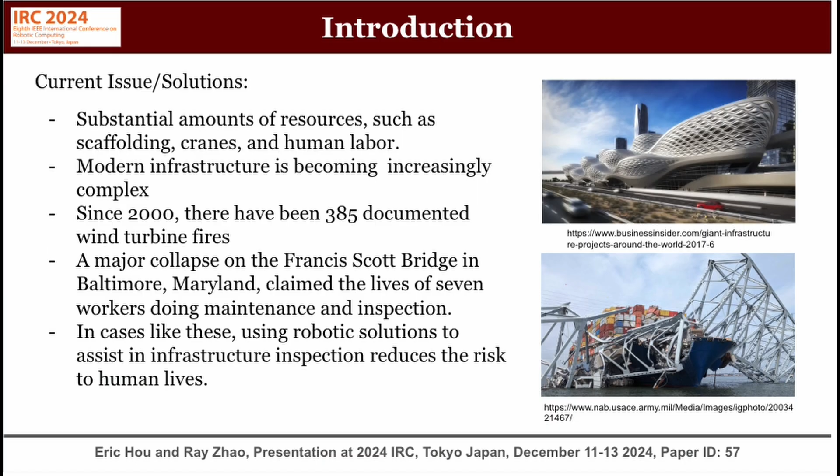Our research objective is to create an infrastructure climbing robot that's able to reach difficult spaces and navigate dangerous environments. It must have an independent autonomous navigation that's able to localize itself in 3D and traverse obstacles in its way. It must also have a high cargo capacity while staying lightweight itself with a rigid structure and overall having a relatively low cost for mass production in the long term.

And we achieve this through Vertipaw, as it's the first quadrupedal robot capable of delivering loads greater than 4 kilograms on any planar surface. And it does this by using an active vacuum suction system that's able to maintain over 150 kilograms stationary. But this suction power also allows it to adapt to rougher surfaces.

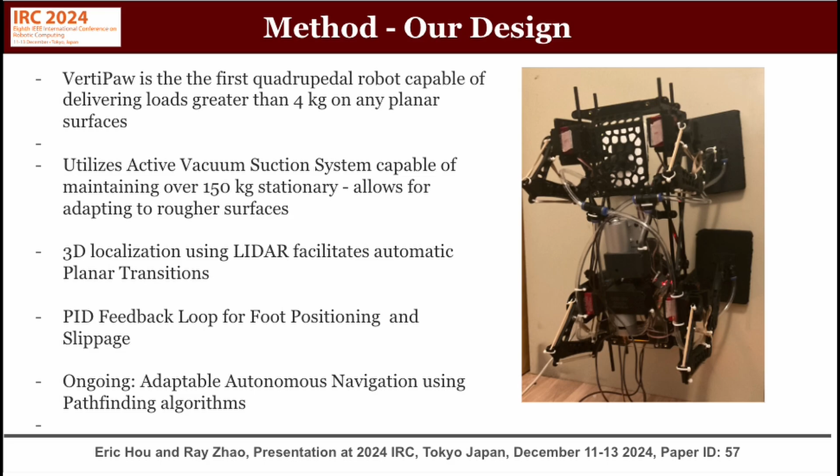The 3D localization is facilitated with LiDAR, and it's able to automatically transition planes, whether it's the wall to the ground, or the ground to the wall, or the wall to the roof, or any other angle. The LiDAR is able to detect that, and it also uses a PID feedback loop for foot positioning and potential slippage. And we're currently still working on the adaptable autonomous navigation system.

Our general hardware configuration consists of 4 legs held together with a carbon fiber rod frame with PETG clamps and struts for rigidity. We power it with a 12-volt power supply or a LiPo battery if we want it to be mobile. And the current suction pad can actually reach around 17 psi within 5 seconds.

And because the suction pad has an area of around 30 inches squared, this pad experiences over 500 pounds of force. And that's pretty astronomical considering we want to 3D print this with PETG. So we had to use finite element analysis to reinforce it. And we also use neoprene rubber strips on the outside that allow for minimal leakage. This allows the system to be unpowered for hours on end.

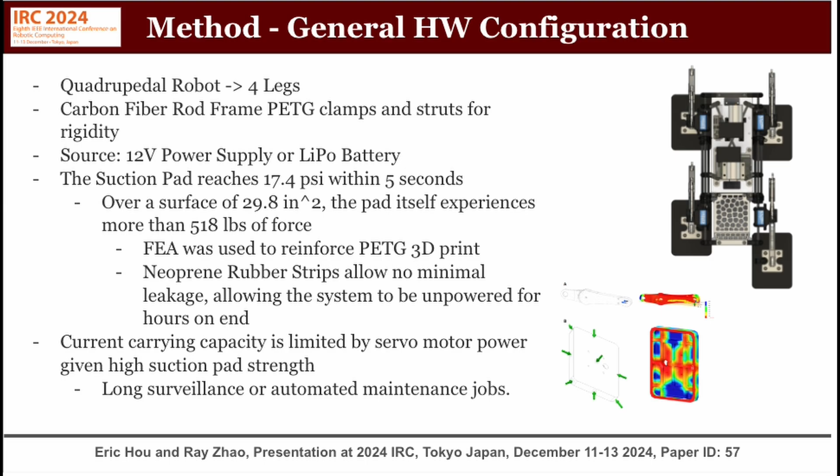And what this means is that the robot can stay on the wall and keep its position for, let's say, an hour or two before it needs to be suctioned again. And this allows for overnight maintenance with minimal power. But also because of how high the suction pad strength is, our current carrying capacity is actually limited by our servo motor power, which we aim to address with counter springing in the next slide.

So counter springing is needed because servo motors alone cannot pull up the entire weight of the robot against gravity. And in order to facilitate that, we use counter springing that closes the center linkage in order to pull up the robot. And we also have 2 other types of springing that allow for this.

So first we have suction pad springing, and this removes the need for active suction pad angle actuation at the bottom of the lower leg. While it's unsuctioned, this springing allows the foot to be within 15 degrees orthogonal to the lower leg. And this allows us to position the lower leg at the correct angle in order to transition planes without the need to change the suction pad angle manually.

And while it's suctioned, it can rotate around 40 degrees about the rotation point, and this allows the quadruped to gait. And finally, we have one more type of springing, which is over-centering prevention springing on the leg, and this prevents the leg linkage from being locked into the wrong configuration.

So if you solve the forward kinematics equations with the 2 motor angles, that can actually result in 2 different XYZ coordinate solutions depending on the configuration of the central linkage. So in order to prevent the leg linkage from going into the over-center clamped position, we want it to stay unclamped. So we have the blue elastic bands that keep it tensioned in one certain configuration.

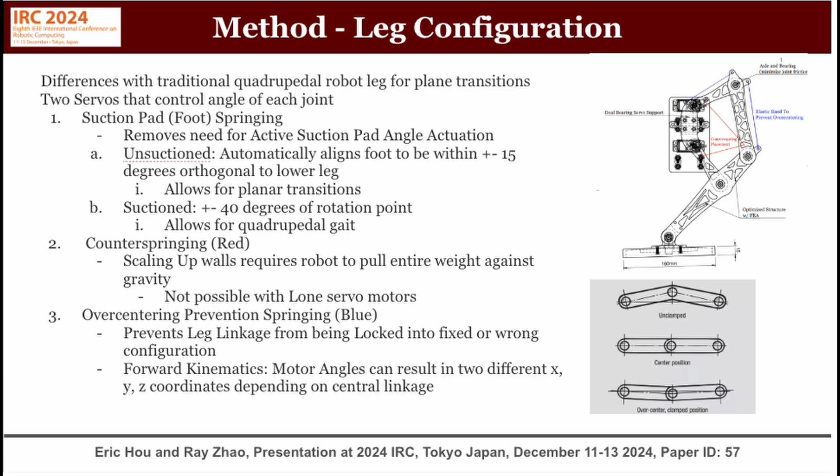Next, we use a Raspberry Pi 4B for all the processing, and we created a custom relay transistor PCB that drives each vacuum pump through a 12-volt power supply. Each vacuum pump drives 2 suction pads, and this is possible because there are never 2 pads on one side on the surface at once during movement. So for example, if we set 1, 2 as the 2 front legs and 3, 4 as the back legs, 1 and 4 are powered, and 2 and 3 are powered simultaneously with 1 suction pump.

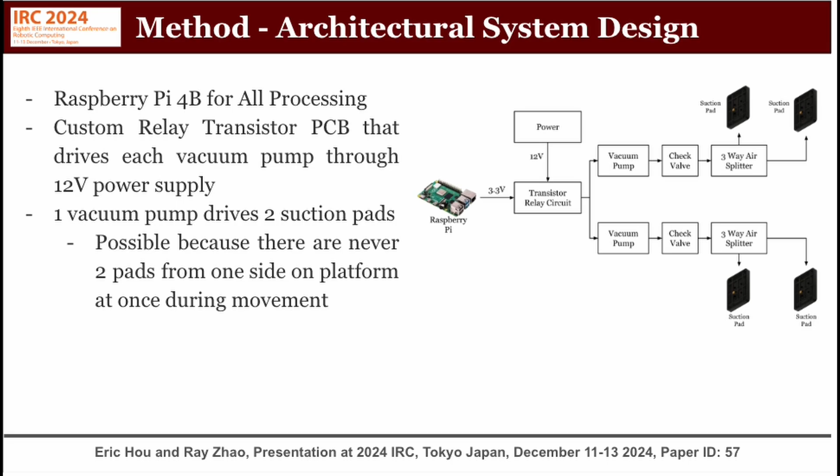So our inverse kinematics calculations are pretty standard. We do have an additional angle conversion because we use the upper linkage, but it's just derivable with basic trigonometry. And we're converting Cartesian coordinates, which is x, y, z, to theta 0, theta 1, which are servomotor angles, which is called inverse kinematics here.

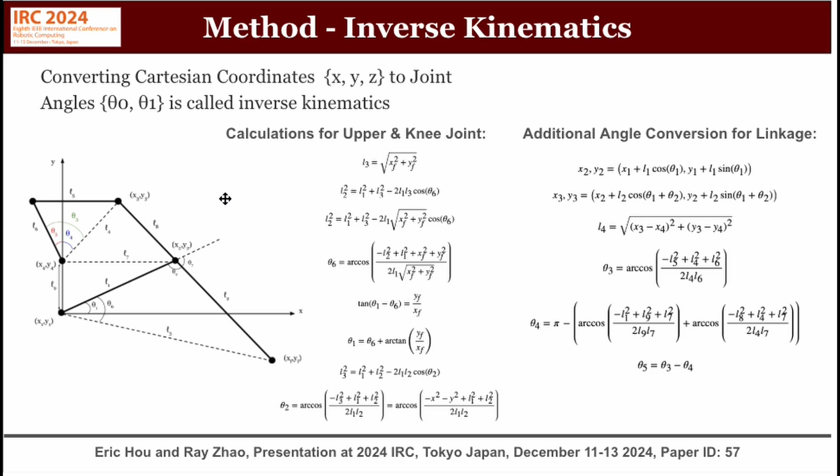And with these inverse kinematics commands, we're able to send a mathematical function through, like a sine theta plus b, and we're able to draw out a series of points with the leg. For example, for the gait, we have a sinusoidal rise forward and a linear retraction back. So it goes forward here, and then it pulls backwards in order to move forward. And for planar transitions, we use a sigmoid function, which is kind of like an S shape, and we pull that forward in order to tilt the robot back.

And each one of these commands is multi-threaded for each leg, and sometimes it's offset by one period in order to maintain the balance of the robot. And we also have a queued state machine, and this stores requests and evaluates the system's current state to determine the ideal sequence of operations and determine whether or not we can continue to the next action, essentially.

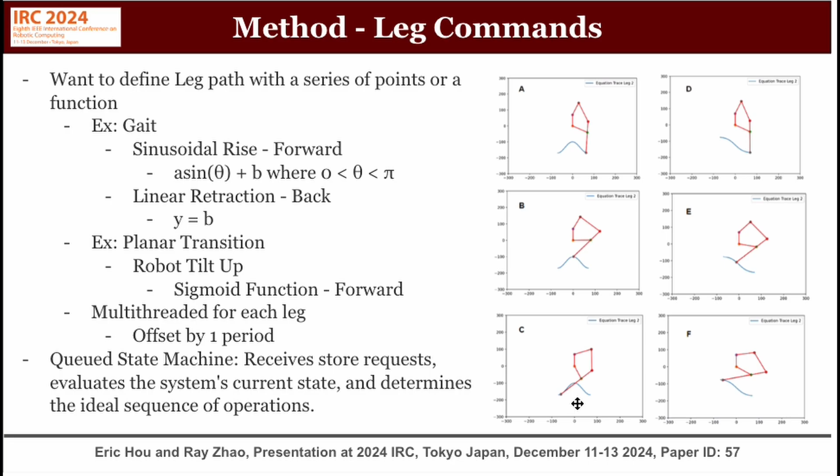We use a LiDAR and a motor that rotates the LiDAR in order to map the surroundings. The first thing that we determine with these values is the wall distance. And to determine the horizontal distance from the wall, it's not as simple as just getting the LiDAR value directly, since we have to convert it through the cosine of the pitch angle that we determined through inverse kinematics.

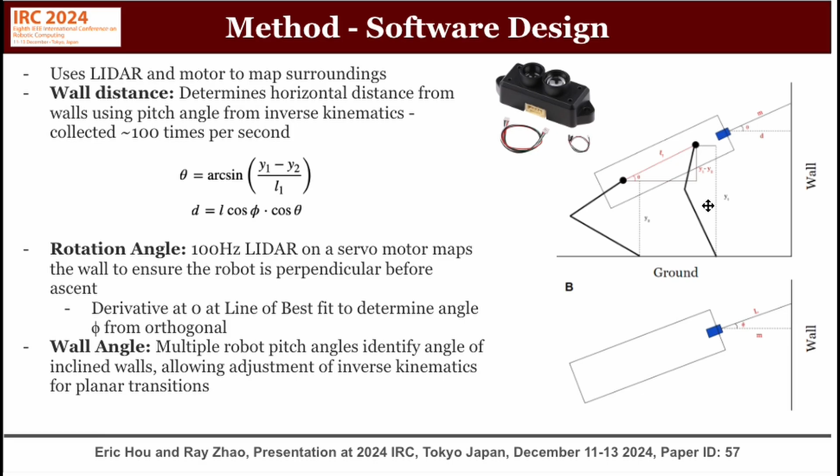And lastly, we have the wall angle, and we will tilt the robot by changing y1 and y2 here. And this will allow the robot to identify the angle of the inclined walls and allow for adjustments for inverse kinematics. So this changes the mathematical functions that we pass to the robot dog. For example, beneath 30 degrees, we actually don't even use the sigmoid function anymore. We just directly modify the sinusoidal curve and linear retraction by cutting off before the complete period of the sine graph.

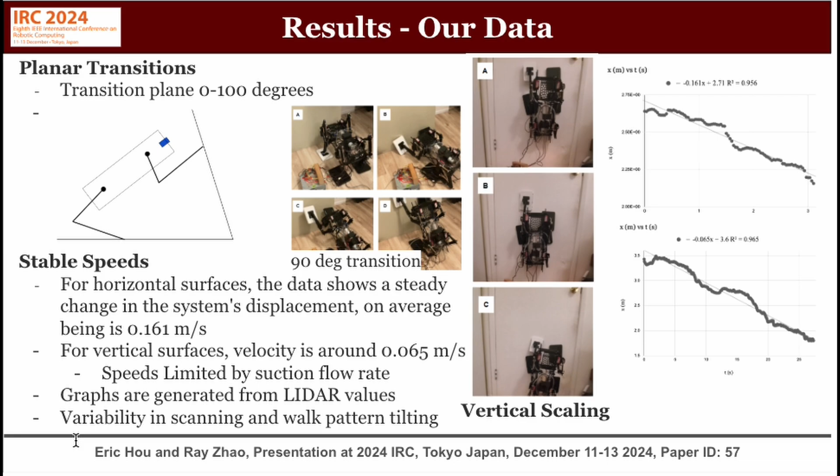As for planar transitions, our robot is capable of rotating from 0 to 100 degrees, so that's more than enough for regular wall transitions, and it can move at a steady pace on horizontal surfaces of 0.161 meters per second, but on vertical surfaces, our velocity is limited by our suction flow rate, which is why it's only 0.065 meters per second. And the graphs are generated using the LiDAR values at the moment, and we have variability in scanning and walk pattern tilting, which creates these curves.

In conclusion, our primary goal of carrying 4 kilograms was achieved. The suction force is still able to carry over 150 kilograms in practice, and this suction power allows for stationary and unpowered operations for extended periods of time. Our maximum movement speed is still primarily limited by foot positioning security and suction flow rate, and we may implement different planting procedures, more than PID algorithms, in the future that will plant with various forces for a secure hold.

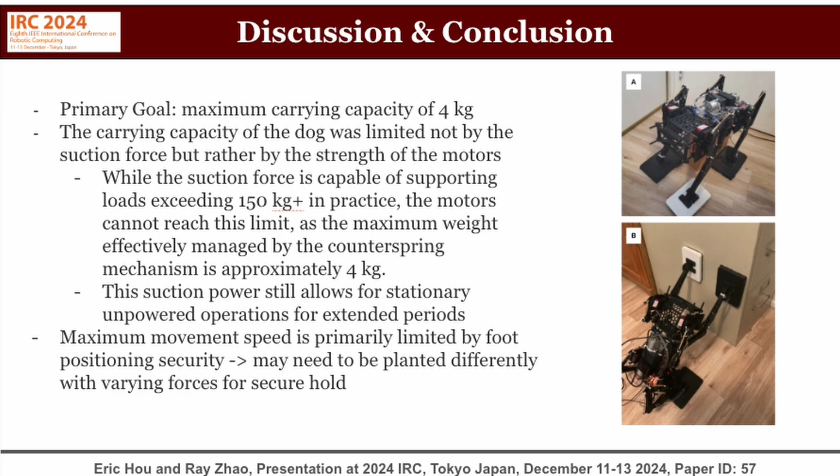In the future, we want to improve the turning capabilities, as when we're planted on the wall, it's difficult for us to rotate, and this is all contingent upon the availability of higher capacity motors, since we may want to make a 3-degree of freedom leg or a twist actuator. With these higher capacity motors, we could also improve the walking pace, and we will continue to use lightweight materials and optimize the leg linkage ratio to further enhance the robot's load-bearing capacity and overall efficiency.

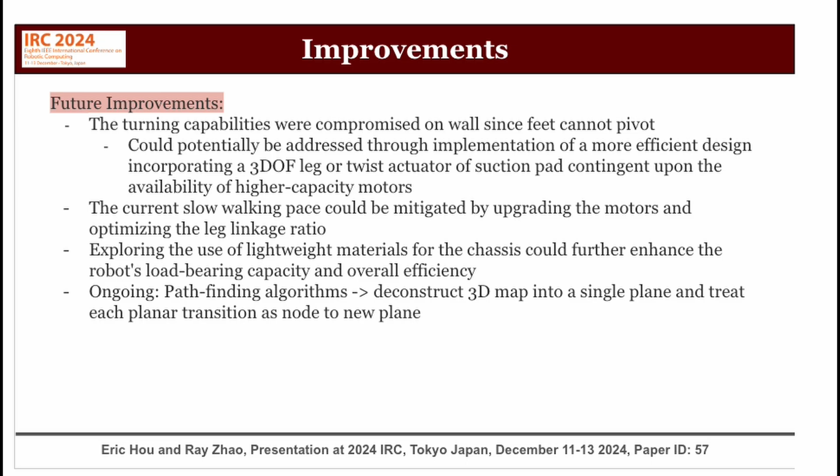Furthermore, we are improving our software by developing novel pathfinding algorithms. We are deconstructing a 3D map into a single plane and treating each planar transition as a node to a new plane so that we can define XYZ coordinates and a plane that will allow us to navigate in 3D autonomously. Thank you.